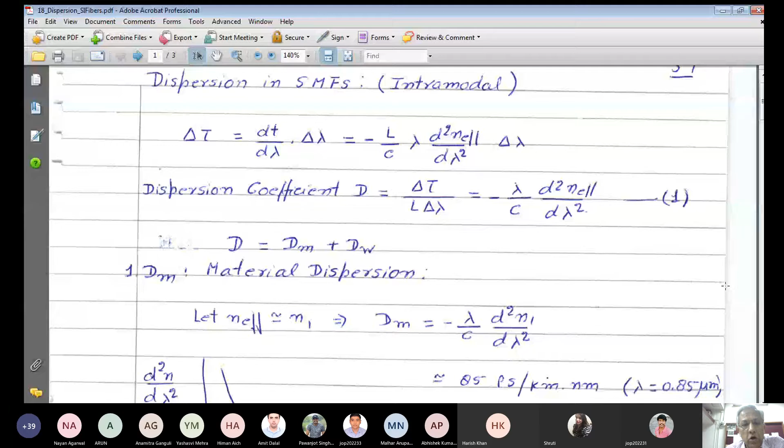So where does this dispersion come from? This dispersion comes basically because the group velocity of different wavelengths is different, and that comes from two factors. First, even if you consider a homogeneous, infinitely extended medium, the refractive index depends on wavelength, so you get different group velocities for different wavelengths, and you get pulse broadening.

That contribution is known as material dispersion. We denote that coefficient Dm.

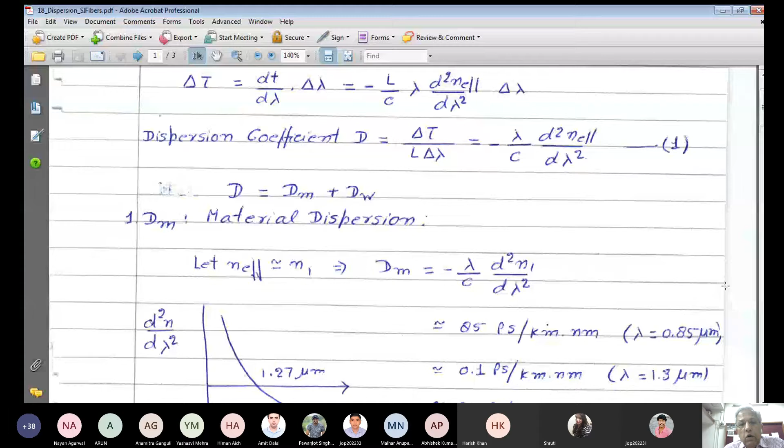But there is another factor: even if I assume that somehow both materials, n1 and n2, have refractive indices that do not depend on wavelength...

...because of the waveguide nature, the V parameter for different wavelengths is different, so the propagation constant would be different, and so the group velocity would be different. So because of this waveguide nature of the structure, we get dispersion here - that contribution is called waveguide dispersion.

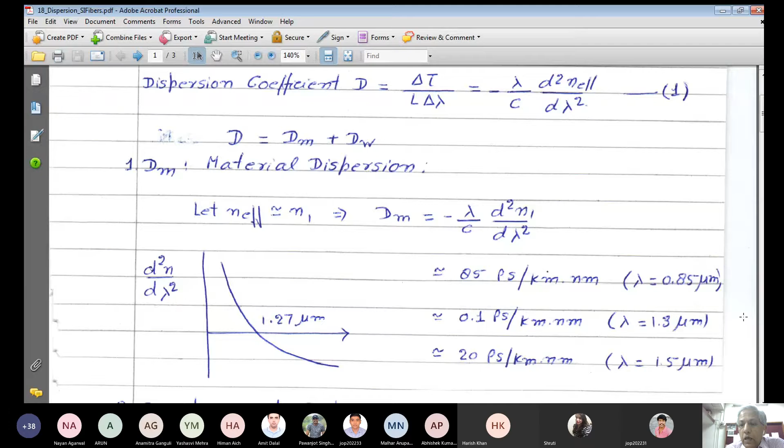So today we will try to understand the contributions of material and waveguide dispersion, their relative contribution, and we will see if we can further improve the performance of the fiber by playing with these two contributions. For example, material dispersion - actually we cannot do much, because once we have selected the fiber material, silica is found to be the best and cheapest material available.

So for this silica single mode fiber, for example, most of the power, say 90%, of the modal power propagates through the core. So in order to have an estimate of the material dispersion...

Let me assume that my n effective is roughly the refractive index of the core. So dm would be minus lambda by c, d square n by d lambda square. This n1 is silica refractive index.

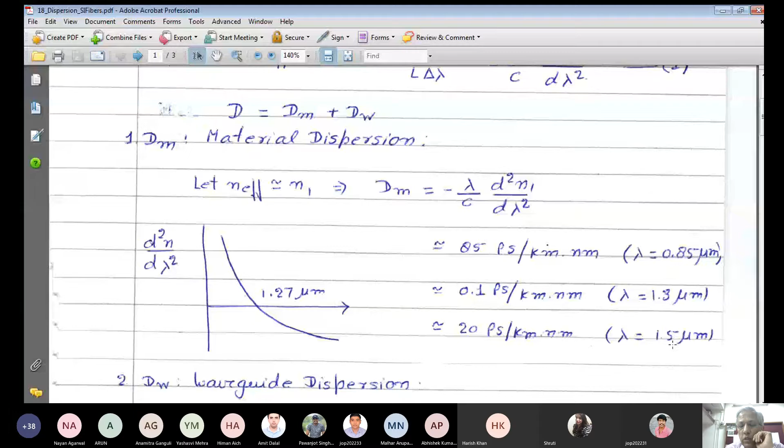I had told you this earlier also, that if you calculate that, this data is available in the books, and you can find out that at different wavelengths, I have considered here 3 different wavelengths: 0.85 micron, because the first generation fibers used this wavelength, then 1.3 micron, because at this the material dispersion is almost 0, and another wavelength of interest is 1.5 micron. I will come to this point, why this is an interesting wavelength.

This is interesting basically because at 1.55 micron, the loss is the minimum possible loss you can achieve in a fiber, that is about 0.18 dB per kilometer. And fortunately, because loss is so small, and even that loss can be compensated using fiber optic amplifiers, erbium doped fiber amplifiers, which operate at 1.55 micron. So that is a very good coincidence that at that wavelength we can have fiber amplifiers also, and at the same time your loss is very small.

So the next thing to improve is that if we can shift the zero of this total dispersion, if we can make it 0 at about 1.55, then nothing like that, because at that point loss is minimum. Then if you can shift this wavelength where the total dispersion is 0 to 1.55, this dispersion would be small, and now the spacing would be decided by the loss.

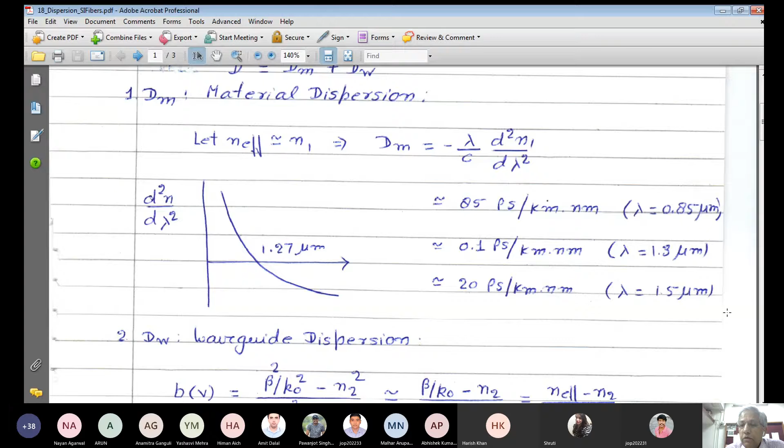In fact, dispersion is almost 0, and then that loss can also be compensated using fiber optic amplifiers. So you will get almost unlimited bandwidth actually. So that is the dream actually, and it is realized now.

So let me come to, material dispersion we cannot do much, that is fixed by the material. So let us look at the waveguide dispersion.

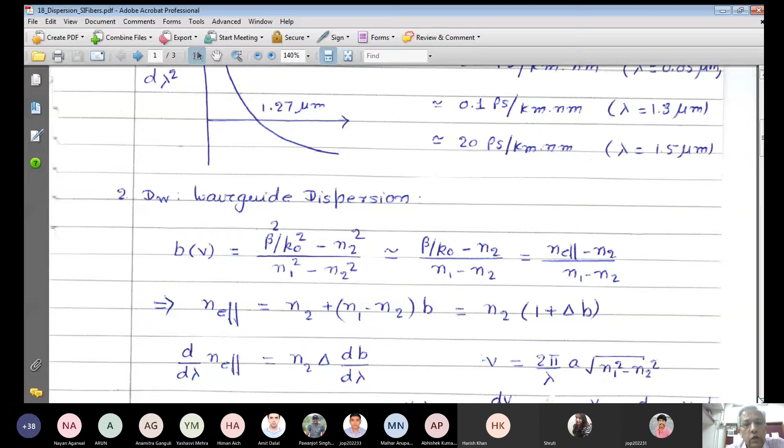I will take, just to get analytical results, certain approximations, but these approximations are quite okay, quite fine. So for waveguide dispersion, whether it is waveguide or material, basically I have to find out n effective, right?

So let me put, first of all, this normalized propagation constant, which is defined like this. If you remember our discussion on step index fiber, B is a function of only the V parameter. The eigenvalue equation, if you remember, the solutions of the eigenvalue equation, for example, fundamental mode, that is, if I remember correctly, it was J0, J1 by J0. Anyway, I don't remember the eigenvalue equation right now.

But once V parameter is fixed, B is fixed. So I will try to put everything in terms of B, because once V parameter is fixed, then you have standard universal results, which give you the value of B. So B is defined like this, and since generally N1 is very close to N2, beta by K naught for guided mode lies between N1 and N2, so I can approximate it like this.

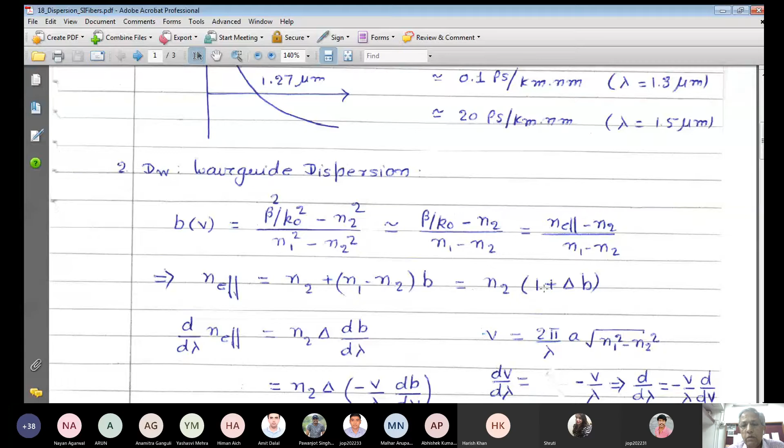So beta by K naught plus N2 would be roughly N1 plus N2. So this would be approximated like this. And from this relation, if you calculate n effective, you can write down N2 plus N1 minus N2 times B, which would be roughly, if I divide by N2, multiplied by numerator N2, N2 you can take outside, 1 plus delta B. So this is how you can approximate the n effective of a single mode fiber, right?

So next I have to find out the second derivative of n effective. And remember, I am calculating waveguide dispersion, so I am not considering now the wavelength dependence of N2 or delta. Material dispersion I have considered separately. So if you assume that N2 and delta are not wavelength dependent, then the first derivative is a very simple calculation.

So you put n effective from here, and this would be N2 delta minus, this is d by d lambda of B, but V is related with lambda like this, and you can show that dV/d lambda is minus V by lambda. So this operator d by d lambda is nothing but minus V by lambda, d by dV.

So I want to put everything in terms of v. So I put this operator d by d lambda in terms of d by dv. So this is what you will get.

And the second derivative again, I have shown you the steps here, and you can go through it, or I can also go through it. So second derivative from this equation, minus n2 delta d by d lambda of this. So this is minus v by lambda square d by dv of v, plus 1 by lambda d by d lambda of v, d by d lambda, I substitute from here, minus v by lambda, d by dv. So you will get this step and this step.

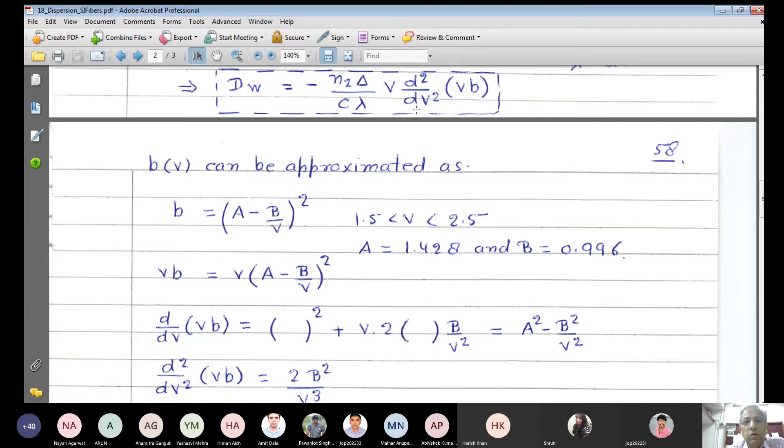And now if you take the second derivative, because here I require second derivative of vb, the second derivative comes out in a very simple form, that is twice b square over v cube. And now if I put this d square by dv square of vb in the dw equation, then what you get is the following.

So the waveguide dispersion comes out to be minus n2 delta by c lambda v, and this value I have just calculated, twice b square by v cube. So one v cancels and you get this, and by definition v square is equal to k naught square a square, n1 square minus n2 square, and n1 square minus n2 square can be written as n2 square into 2 delta. This we had discussed several times.

And dw in terms of wavelength, etc., that becomes like this. So now I would like you to concentrate on this expression. Waveguide dispersion coefficient is given by minus lambda upon a square b square, 4 pi square n2 c.

So at any wavelength, you can see the waveguide dispersion can be tailored by selecting the value of a. b is constant, n2 is almost constant, lambda is given. So at any wavelength, you can now play with the waveguide dispersion by selecting an appropriate value of a. If you decrease a, waveguide dispersion would increase, and if you increase a, waveguide dispersion would decrease.

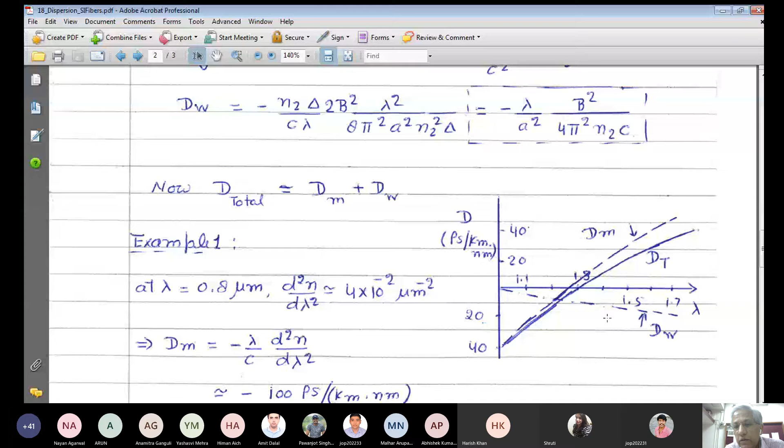I have taken a few examples to show how you can tailor this total dispersion. For example, if I take lambda equal to 0.8 micron, you can get d-square n by d-lambda-square for silica from handbooks, about 4 times 10 to the power minus 2 micrometer minus 2. If you calculate Dm, a simple calculation gives minus 100 picosecond per kilometer nanometer. Now let me find the waveguide dispersion.

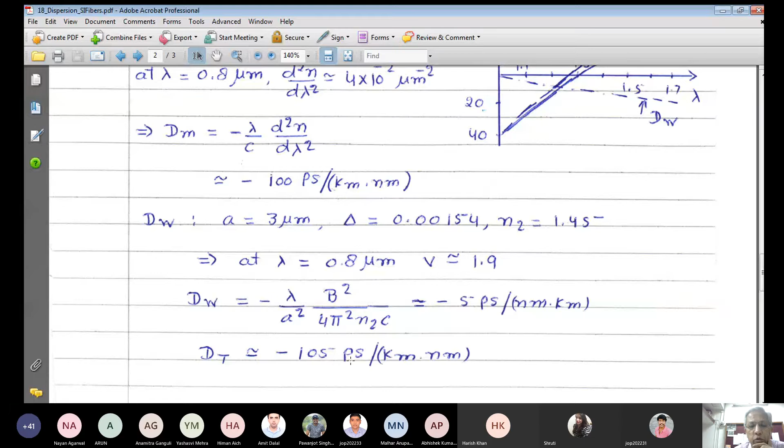I have selected the fiber parameters such that at lambda equal to 0.8, the V parameter is roughly 1.9, with core radius A equal to 3 micron and delta 0.00154. These examples are from Optical Electronics by Professor Ghatak and Thyagarajan. With N2 equal to 1.45, Dw comes out to be minus 5 picosecond per nanometer kilometer. So the total dispersion would be minus 105 picosecond per kilometer nanometer.

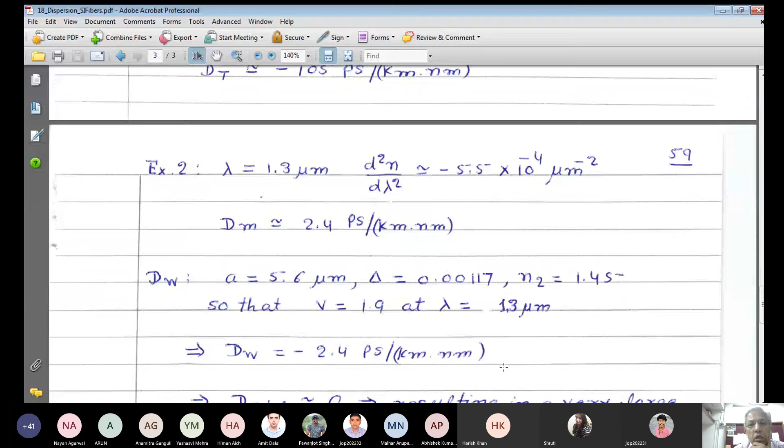But now I will take another example to show that by selecting different fiber parameters you can get a different total dispersion. At 1.3 micron, the second derivative of refractive index is about minus 5.5 times 10 to the power minus 4 micrometer minus 2, and if you calculate the material dispersion, it comes out to be plus 2.4 picosecond per kilometer nanometer.

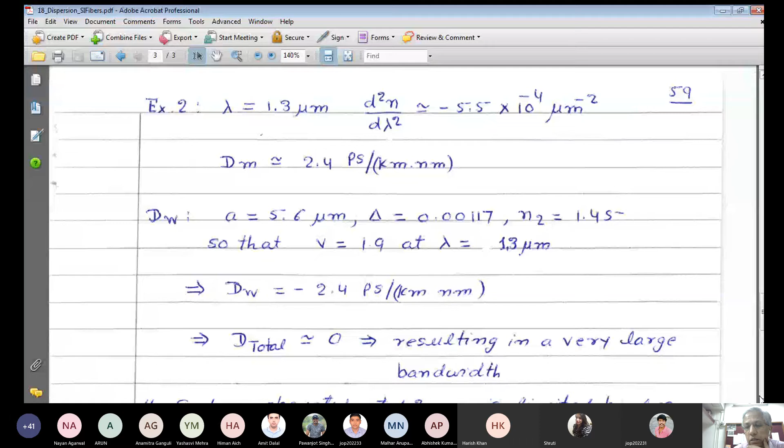Now I can select the fiber parameters such that the total dispersion becomes zero at 1.3 micron. This happens if I select A equal to 5.6 micron, delta equal to 0.00117, and N2 roughly 1.45, again giving V parameter as 1.9 at wavelength 1.3 micron. Calculating the waveguide dispersion, it comes out to be minus 2.4 picosecond. So material dispersion is plus 2.4 and waveguide dispersion is minus 2.4 picosecond per kilometer nanometer, so the total dispersion becomes zero at 1.3, resulting in a very large bandwidth.

Now remember, when the total dispersion coefficient is zero, it does not mean the total pulse spreading is zero. The reason is that you are working around 1.3 and your pulse has a finite bandwidth, so you will have wavelengths on both sides of 1.3 where the dispersion coefficient is not zero. So you will still get some broadening.

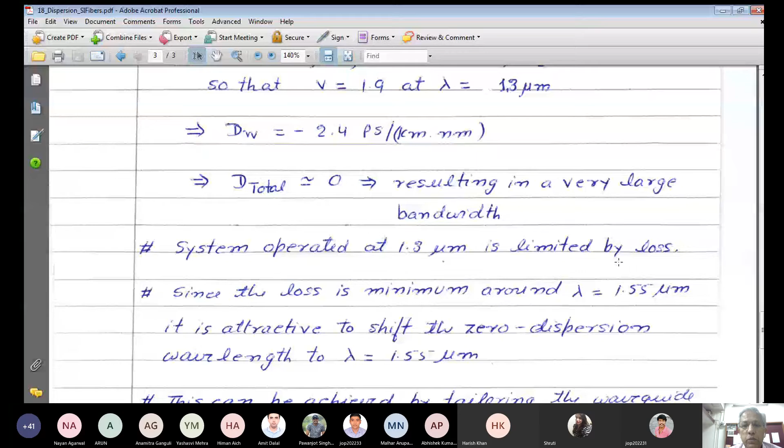But anyway, at this particular wavelength the total dispersion is very low. So if my carrier frequency is around 1.3, pulses generated around that carrier frequency would have extremely low dispersion, resulting in a very large bandwidth.

So the point to appreciate is that systems operated at 1.3 are now limited by loss, because dispersion is zero, so you can go to very large lengths. The only limiting factor would then be loss, because after a certain distance, if the loss is too high and the intensity of the pulse is too low to detect, that becomes the limitation.

Now, since loss is minimum around 1.55 micron, it is attractive to shift the zero dispersion wavelength. By the way, this wavelength at which the total dispersion, the sum of material and waveguide dispersion, is zero, is known as the zero dispersion wavelength.

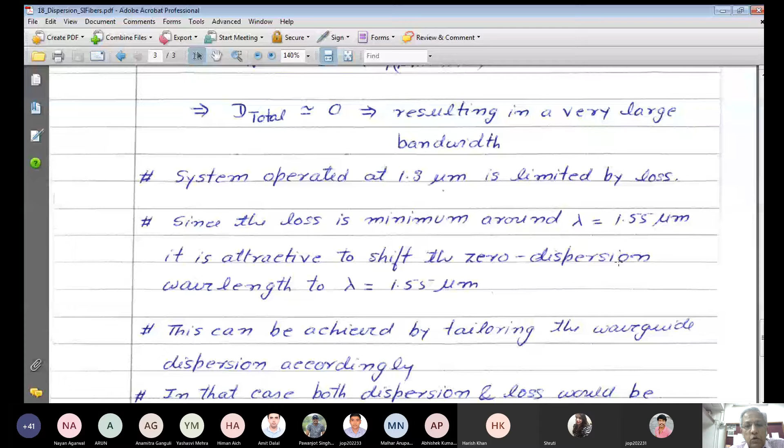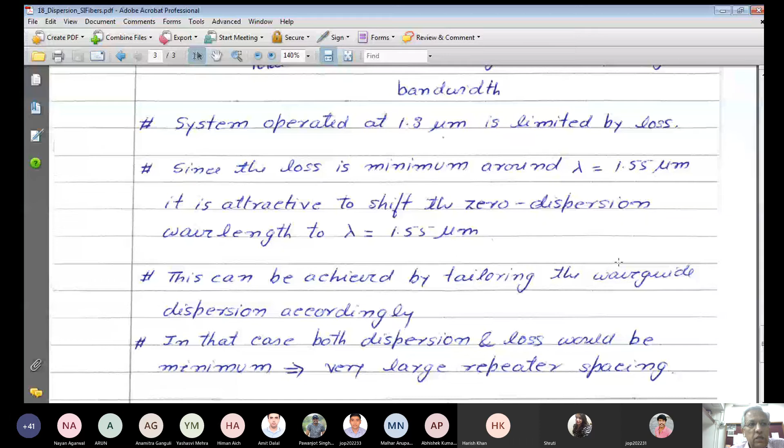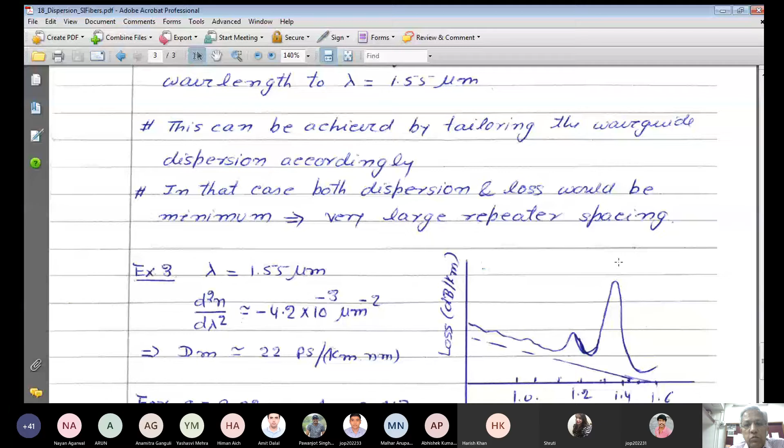That is a standard terminology we use. So it is attractive to shift the zero dispersion wavelength to lambda equal to 1.55. This can be achieved by tailoring the waveguide dispersion accordingly, and selecting fiber parameters such that total dispersion becomes zero at 1.55. That would be the best thing, because then both dispersion and loss would be minimum, and you would get large repeater spacing.

Here I have shown you a typical loss curve of a fiber. Generally at 1.3 you have a low loss window, and we also have low loss at 1.55. So people always dream that if you can combine both, that is possible.

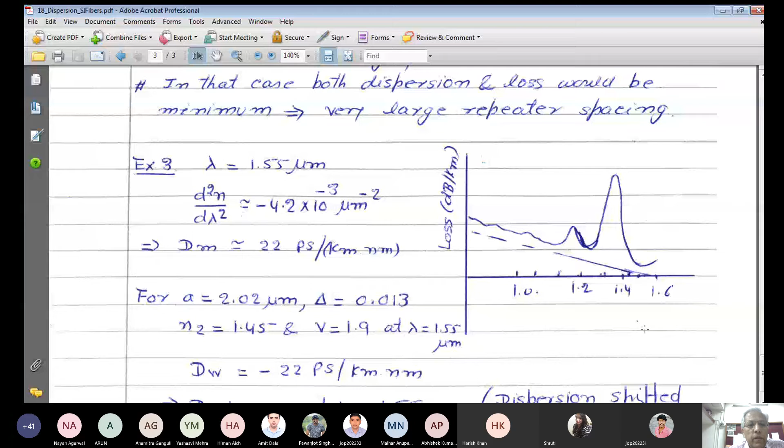For example, in this last example, at lambda equal to 1.55 micron, the second derivative of the refractive index for silica is minus 4.2 times 10 to the power minus 3 micrometer minus 2, and material dispersion comes out roughly 22 picoseconds per kilometer nanometer.

You can always select the fiber parameters. I have given one example here: if I select A equal to 2.02 micron, delta 0.013, N2 again, and I have selected these parameters such that now the V parameter at 1.55 micron is 1.9 - I am comparing the same fibers, and in all examples V parameter I am taking as 1.9. So dW comes out to be minus 22 picoseconds for this. You can verify this yourself since all parameters are known. So total dispersion now becomes zero at lambda equal to 1.55.

So by tailoring the waveguide dispersion, we have shifted the zero dispersion wavelength to 1.55 micron. Such fibers are known as dispersion shifted fibers. Those fibers which are optimized around 1.3 micron are known as conventional single mode fibers, CSF. And these fibers for which total dispersion is zero at 1.55 micron are known as dispersion shifted fibers, DSF.

So I would stop here today, and if there is any question, I will be happy to answer it. Otherwise, we will now focus on the quiz. So let me know if there is any problem up to this point.

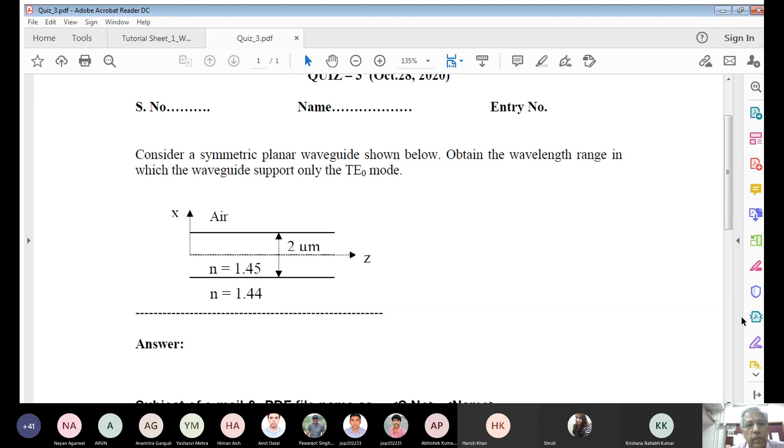So start, and if you have any difficulty or confusion, let me know. So you are given a planar waveguide: substrate refractive index 1.44, core refractive index 1.45, top index is air, you can take it as 1, total width is 2 micron. You have to find out what wavelength range the waveguide would support for only 1 TE mode.

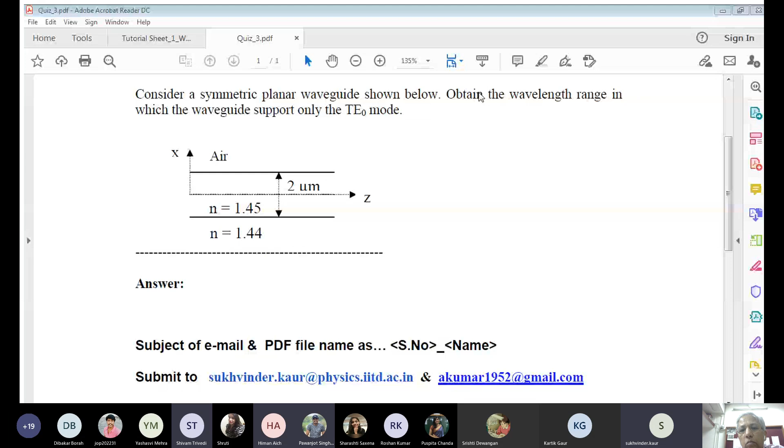Have you received my email? Yes, I got serial number 3. Ma'am, can you confirm for Himan, my serial number is 25, the previous one has some problem.